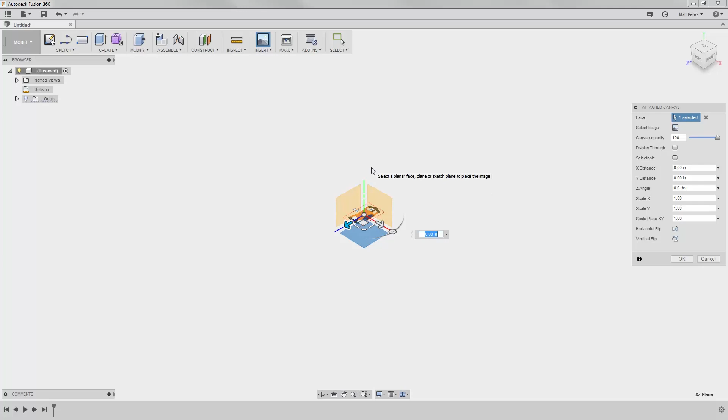I'm going to rotate my view around slightly, zoom in a little bit, and notice that on screen we have various options to do things like mirror the image. We can scale, move, and rotate it by grabbing some of these handles. We're going to rotate it 90 degrees so that when we view it from the top plane, it's in this orientation.

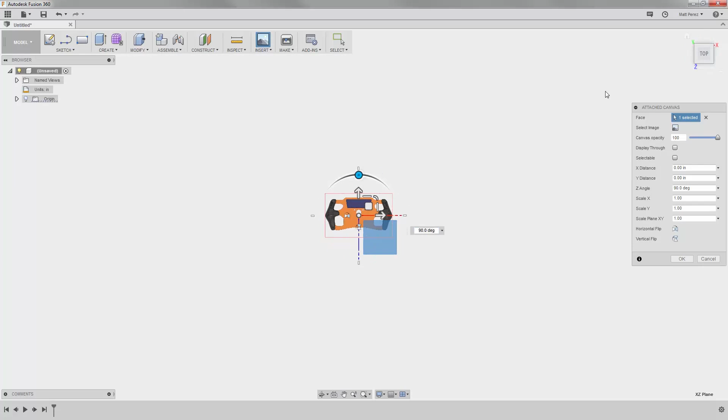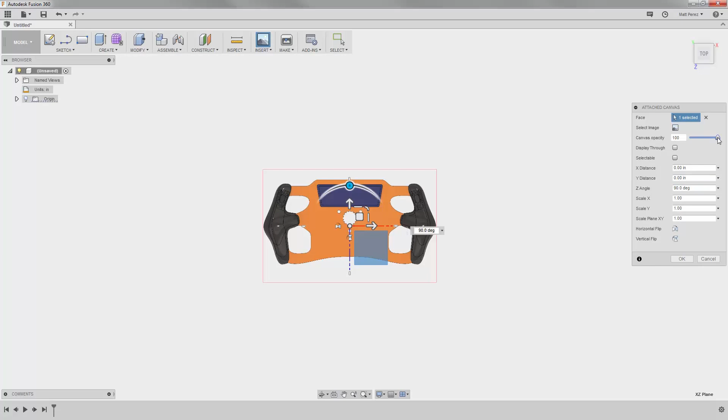This section right here will be our gauge or our display, and then we have hand grips and areas for buttons. Once we have the orientation correct, we're going to select OK. But notice that we have various options in here. Depending on what products you're designing, you might change the opacity, maybe bring it down to 50%. You can also manually enter a value here. In this case, we'll say 50%.

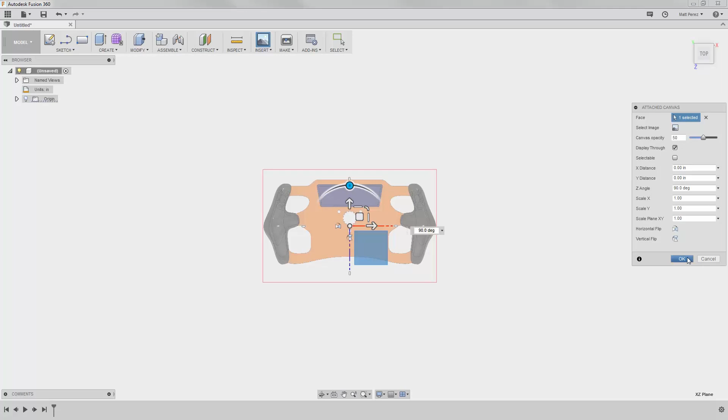We can select Display Through, and we can also make the attached canvas selectable. Display Through will allow us to display and see the canvas through solid geometry. We also have various options to orient, scale, as well as rotate. For right now, let's select OK. Notice in our browser we now have a Canvases folder. If we expand this, we have the Canvas steering wheel. We can turn this on and off, as well as the entire folder.

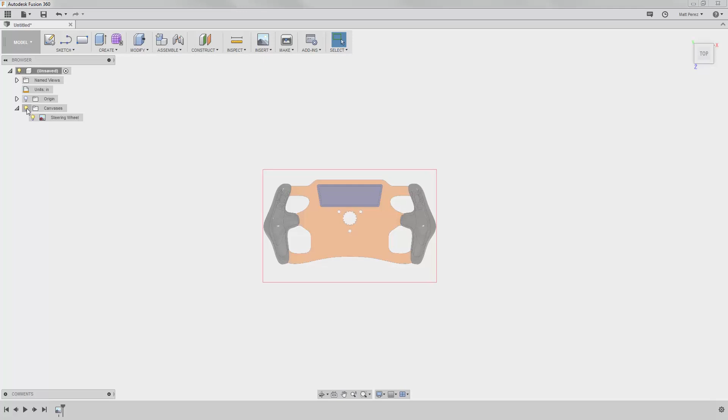One of the more difficult things to do whenever you're using an attached canvas in Fusion 360 or any other CAD system is to make sure that the scale is right. Because we're dealing with an image, there's no scale associated with it. The size and the pixels will dictate how big the image is going to be. So if you have a smaller or larger image, it could affect the size of the product you're designing. Fusion 360 has a wonderful tool built in called Calibrate.

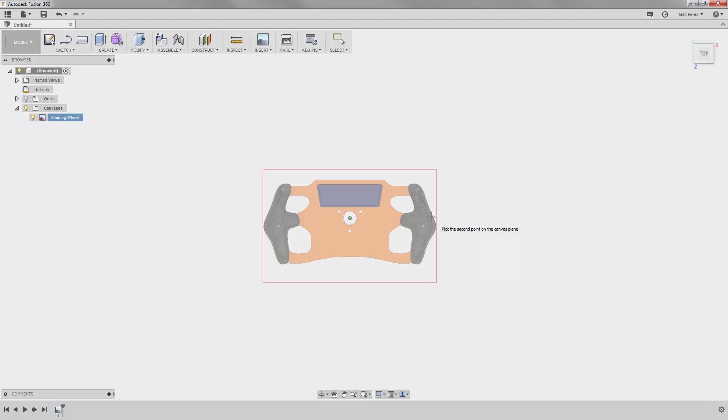So let's right-click on Steering Wheel, navigate down to Calibrate, and notice that now we want to select 2 points. I'm going to start roughly at the origin and drag out to the right, staying roughly horizontal, to the farthest point out. Currently this is 0.34 inches, so it's fairly small based on the image size. What I want this to be is 6 inches.

We can change to Fit to Screen. And now we've calibrated the size of our attached canvas to make it roughly 12 inches wide. This Calibrate tool allows us to make sure that the images we're basing our products off of are going to be an accurate representation of the size of the parts that we want.

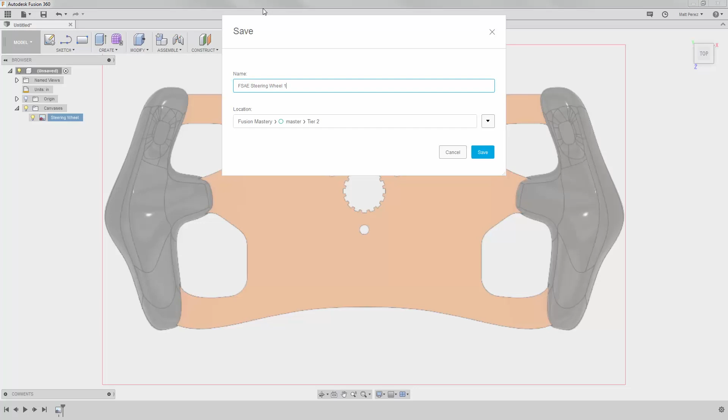Now let's go ahead and save our file. Make sure that you're saving into Fusion Mastery Tier 2, and we want to call this file FSAE Steering Wheel 1. Go ahead and save the file. Now we can move on to our next example.